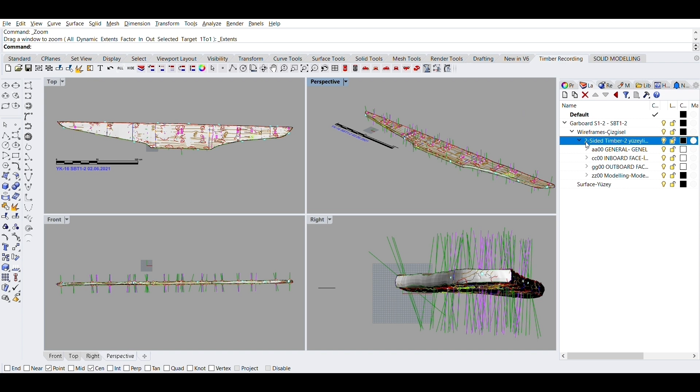Rhinoceros 3D software was used to capture point data from the FaroArm of the Yenikapi 16 wreck and to create digital solid models of the timbers. The software interface provides a multi-view screen that offers both a 3D workspace and 2D views.

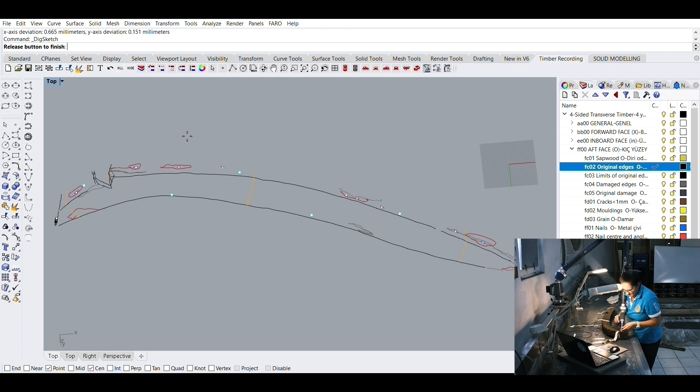Within the device, 25 different elements such as tool marks, section and plan views, wood and metal fasteners, wood grain, damaged parts, and original joints, which can serve as references for determining shipbuilding techniques on wooden elements, were evaluated and recorded in different colors in the Rhinoceros program.

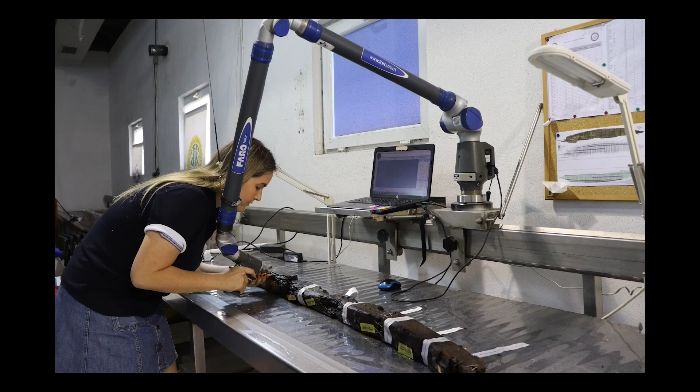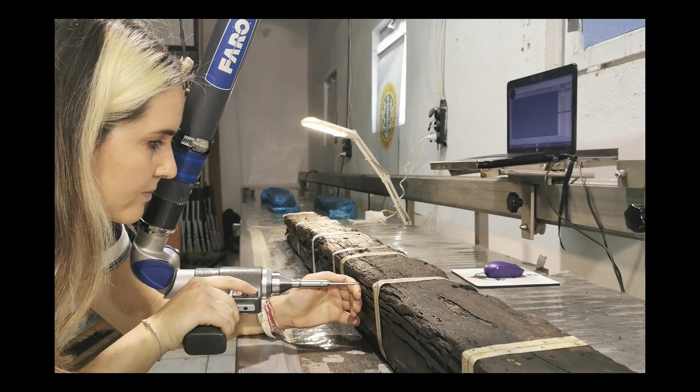In total, 208 ship components of the Yenikapi 16 shipwreck were recorded, and models were created through the study. 9 of the frames, which had high water content and intense deterioration, could not be modeled. For each ship component documented linearly, 3D solid models were created with the help of Rhinoceros software.

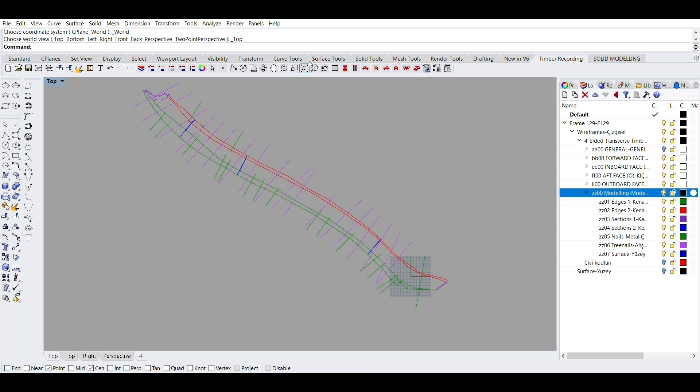Once the modeling phase was completed, the file was simplified by redrawing the existing drawing. A separate model of each surface was created based on the simplified drawing, and then all these surfaces were combined.

The 3D models obtained from the one-to-one scale drawing made with the FaroArm device were aligned with the drawing obtained with the in-situ total station drawing. With the data generated, a 3D model of the in-situ Yenikapi 16 shipwreck measuring 22.5 meters in length and 2.4 meters in width was produced.

A scaled physical research model of the original boat form can be made using the digital solid model obtained by creating comprehensive and detailed digital data. Additionally, digital and physical 3D reconstructions that will be created in the subsequent phases will serve as a guide for the final reconstruction and reshaping of the ship timbers after conservation.